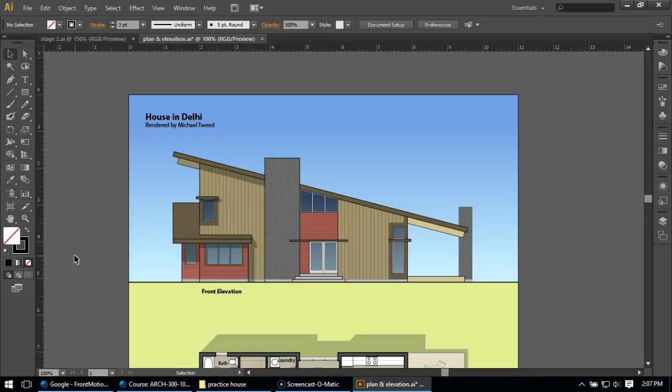I'm sure I'll talk about in class how I have this great Illustrator tree that I made, and it really is fantastic, but that's for a different topic for a different time.

What we're going to do is start our process of downloading things from Google and putting them into the file. So the first thing I'm going to do is go to Google, and I can do an image search by coming up here and hitting the image button, and when I type in something like tree and press return, it will return a bunch of pictures of trees.

What we want to do is save one that we can use in the background, and there's a few things we need to do to easily get this to work for where we currently are in Illustrator. For example, I may like this tree here, but it's got a sky and a ground, and if I put this into Illustrator, I'm going to see the whole photograph, so that's not going to work for me, unless I know Photoshop and can cut it out and want to spend the time doing it.

But we can see lots of other trees already have things cut out from them, and we don't have to do all that work. So we're not going to go over that step. We're just going to take an easy way around.

If I click on this one, we can see that maybe this tree would work for us, but it's going to turn out it doesn't work. I'm going to show you the reason why. Notice that this background is white. That means the background is white, just like this background is a sky and ground, and if I brought this in, it's going to have a big white square around it, but I don't want a big white square around the tree. I want it to take on the sky gradient that I applied in a couple videos ago.

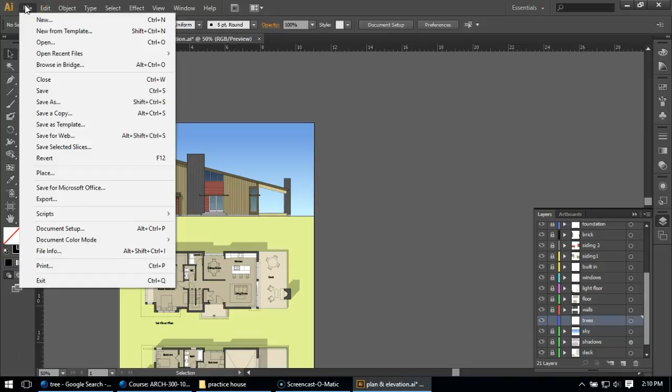And I'm going to place this tree into the file. So to do that, I'm going to go to File, Place, and I will go and find that file that I just did, which is right here because I've got it open, this hackberry tree.

Now, be careful - you can keep your file linked. If I link this in and I place this in as is, it needs to find the exact same spot. So if you just save this tree on your desktop in the studio and the computer restarts and it's no longer on the desktop, you will lose it. It will not be in your file.

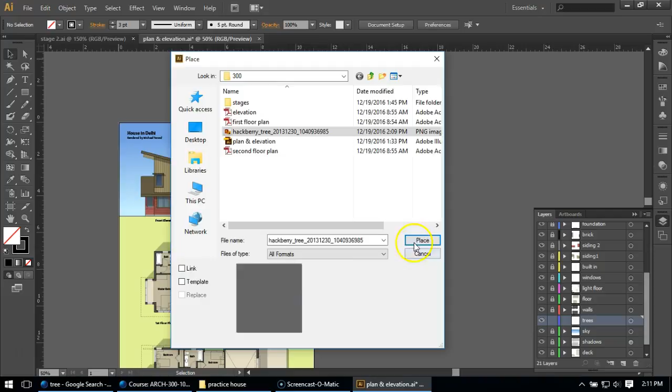So a safe way of doing it is to unlink it. Now that's going to make your Illustrator file bigger, but you're never going to lose the tree. It really doesn't matter as long as you have good practice, but for safety it might be better just to unlink it. So I'm going to go to Place. It's going to bring in the tree.

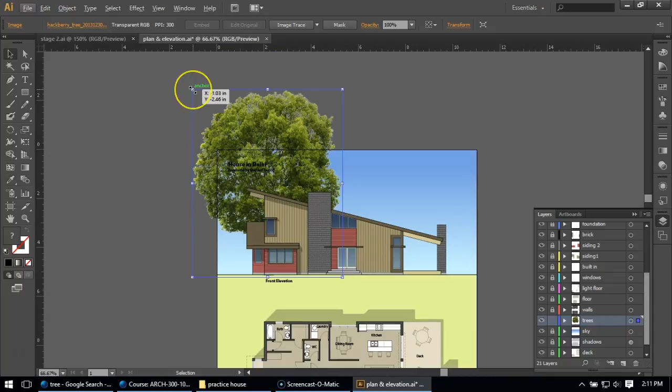Well, clearly this tree is way too big. It's not a problem. What I'll do is I'll scale it. In an elevation, the trees always sit on the ground line, so I can move the base of my tree right to the ground line that I have developed. And what I'll do is I can come up to the top corner until I get this angled double arrow here, click and pull and scale.

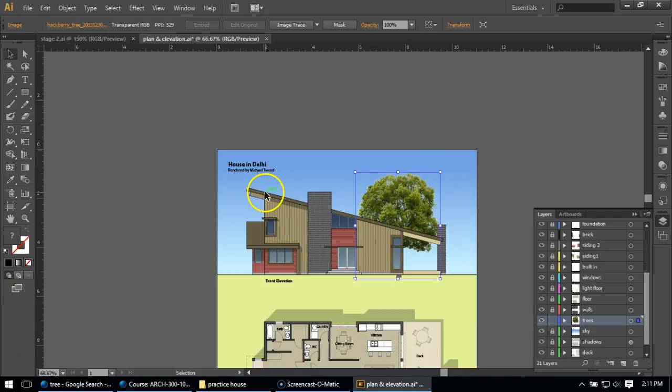If I hold shift, it'll be scaled proportionally, although a tree is organic and doesn't necessarily need to be perfectly even. And I can pull it over to maybe a good spot that I want to see it. Now this building is 2 stories, so maybe that's around 30 feet. That's a small tree, so I could actually make this bigger. If I wanted to, I could maybe even make it go beyond the top of the screen.

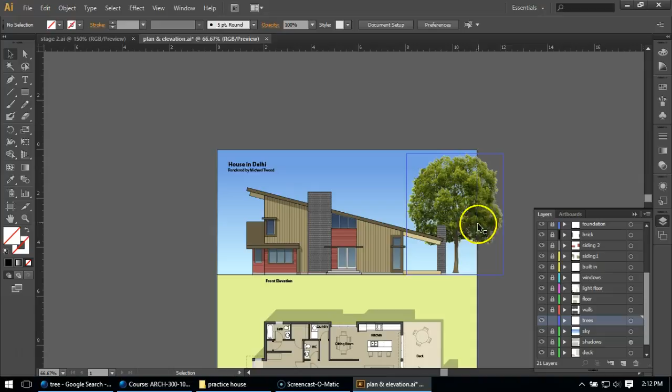In fact, I always recommend when you're doing trees that at least one hang off the side. So we notice that the edge of my paper is right here, but my tree is hanging over it. I got to move it down just a little bit here. There we go. But my edge is right here. When I go to print this, this part of the tree will be cut off, and it'll make it look like my trees are here.

If you contain all your trees within the paper size, it looks too forced. Because there's no way, if this was in sort of Delhi, as mine implies, or some sort of place in the country, that you would have trees perfectly aligned so that they fit perfectly in your rendering. They're random. They grow where they want to grow, so they hang off of things. Now what I'm going to do is use the same tree, though you could use multiple different trees, which would be nice as well.

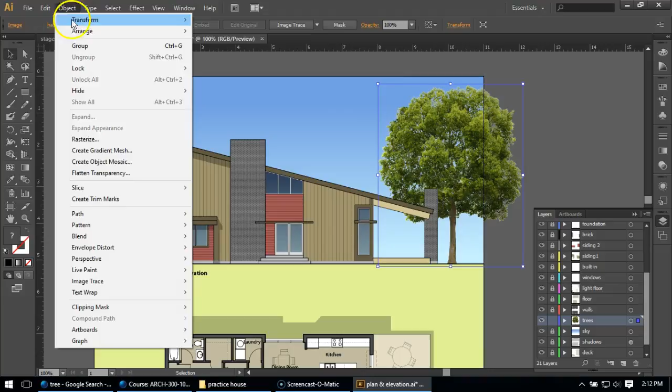Notice one thing too, which is nice about my tree: the light's coming from the top left, just like the light on my building is coming from the top left. If your tree shadow is coming from the top right, you could flip this under Object, Transform, Reflect, and I'll just do a preview. We can see it flips the lighting direction. I don't need to do that, so I'm canceling out.

But if your tree shadow that you liked was coming from the wrong side, it's usually going to come from the top, because that's where the sun's going to come, but it's a matter of left and right. You can just mirror it like that. Mine happens to be coming from the correct side here. So I'm going to put one there. I'm going to make a copy by using my black arrow, Alt, click and pull.

Of course, trees aren't identical, so I'm going to just maybe squish this down a little bit, move it in here, so it sort of comes into that location there, and at least it looks a little bit different because I squished it a little bit. It's not quite the right height, and I might just put one more off to the side on this side, and stretch it out and stretch it up a little bit, sort of getting in the way of my title there. I might want to move my title name if that's indeed where I want my tree.

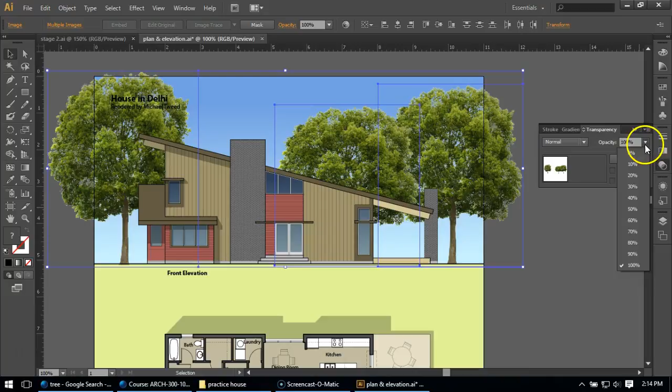But I'm going to do one more thing, because right now these trees are big and bold. I always have a problem with using realistic trees in almost any rendering for this purpose, but it's the easiest way to do it right now. But one way to tone that down is to select all of these trees and come over here and make them semi-transparent. They don't even have to be much, something like 80%. It's just going to tone those trees down a little bit to fade them. And they're in the distance anyway, so it sort of makes sense.

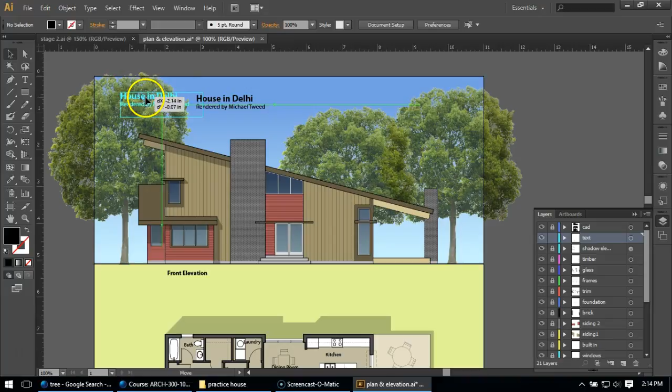And what I'll do now is come and unlock my text layer, and it looks like I'm just going to pull my title inbound because it's too hard to read. I don't necessarily like that spot either. Let's see, where might be a good spot for this. One thing I could do is keep my title here and change it to white. I wonder what that'll look like.

Yeah, I can read that. I'll go with that. A little tweak there. If you don't have a tree there, it's not a problem. There's lots of ways of solving that issue.

So there's trees. I want to add a scale figure or two, and I'm basically going to do it the same way. I want to put my scale figures pretty much on top. They want to be below the shadows, because if there is a shadow that they go into, they're going to be cast on it, but above all the rest of the rendering. So I'm going to do a scale figure in this location here.

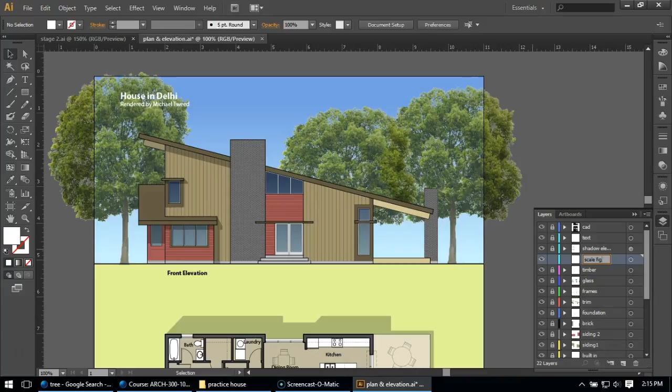I'm going to go back to my search, and I'm going to type in man walking silhouette. Transparent's fine. It's not going to turn up transparent, but I'm going to show you what I'm going to do. You could do women walking, you could do person sitting, whatever the case might be. I'm just going to do this. And I'm going to start with one scale figure. You might put in more.

And I'm going to click on this, and we're going to notice that it's not transparent. But because I'm using a silhouette, I have a shortcut I can do in Illustrator to make this transparent really easily, or quasi-transparent. But you don't have to do black. You could do a white scale figure. You could do a real person scale figure. You could do a gray scale figure. There's lots of different options out there, but I like doing it this way.

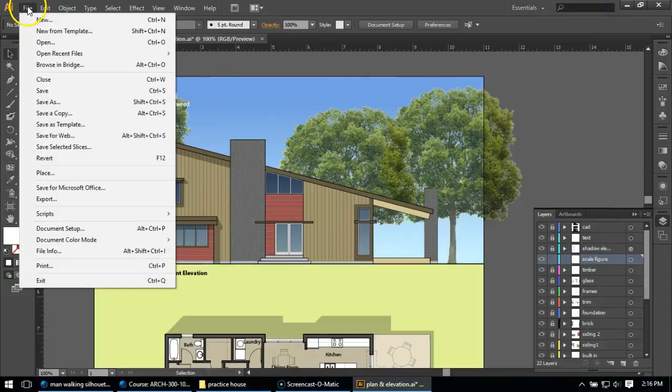I'm going to base it off of this guy. I'm going to right-click, do Save Image, just like I did for the tree. I'm going to save the image. I'm going to come to my Illustrator file. I'm going to go File, Place. I'm going to place this in, and it comes in as white, right? Which is not what I want.

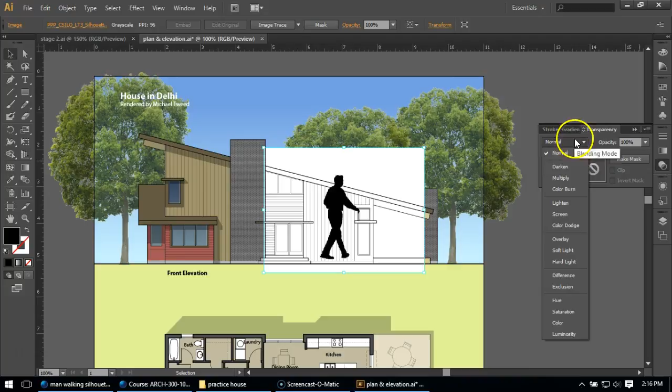But watch this. I'm going to go to transparency. I'm not going to change the transparency. What I'm going to do is I'm going to come over to here. This thing is called your blending mode, and I'm going to go to multiply, and what it does is it knocks out the white.

What multiply does simply is it takes anything that's white and makes it 100% transparent, anything that's black makes it 0% transparent, and anything that's in between, a gray tone or a color, it makes it the related proportional transparency of that. So when I have a black and white drawing like this man, or what you often have in architecture, it's a great way to make everything transparent except for the black pieces.

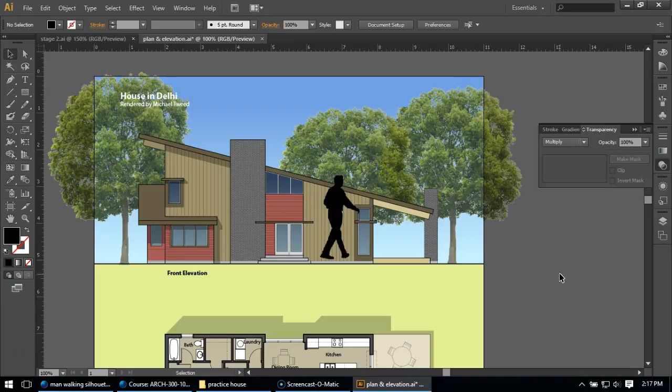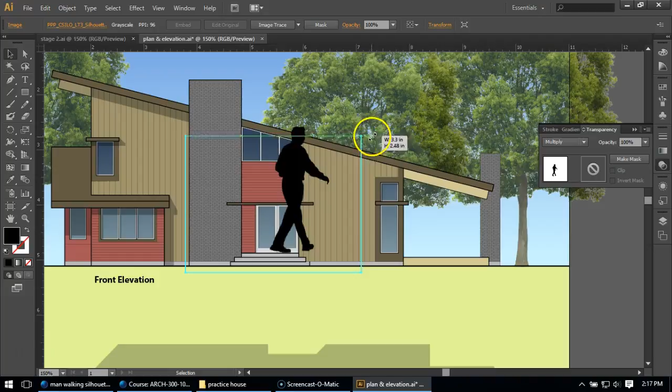Now, of course, right now this guy is a super giant. He is not correctly scaled, so I just need to scale him down, and I might use the door. If this is about a 7-foot door or so, I know he's going to be smaller than that, so I can at first sort of float him up in the air up here, come up to the corner, get the double arrow, press shift and pull in, because a person does want to be scaled the same. I don't want to make them short and squat, which will happen if I just pull down like that, right? That doesn't look right. I'm going to undo that.

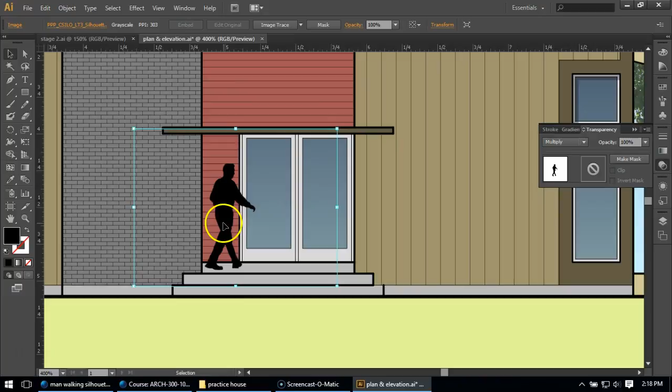I'm just going to go from the corner and hold shift so it's proportional until he's about the height of what a person would be against that door. A little bit smaller. Maybe a touch bigger. Of course, people aren't exactly the same height, so it doesn't matter, but I think somewhere around there looks pretty good. So then I can just move him wherever I want. He doesn't have to be at the front door.

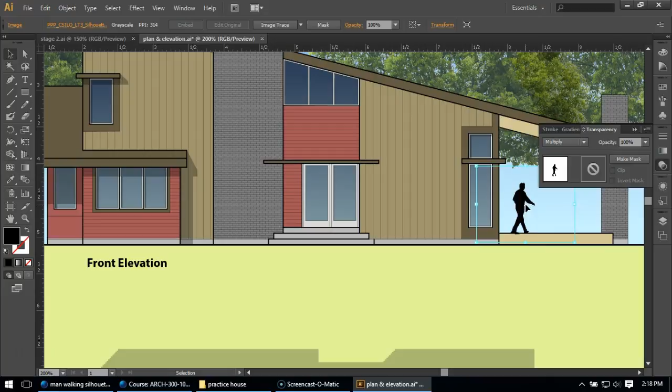I think what might be nice is if he's standing up over here on this deck. So I will put him there. You can sort of see how that fits into that. Again, you should add more people. It'd be great to have some people sitting out here on the deck. Maybe over here can be really sort of nice and lively. But I'm going to end it there in the interest of time, because I'm already over 10 minutes on this video, and it's really quite simple and easy.

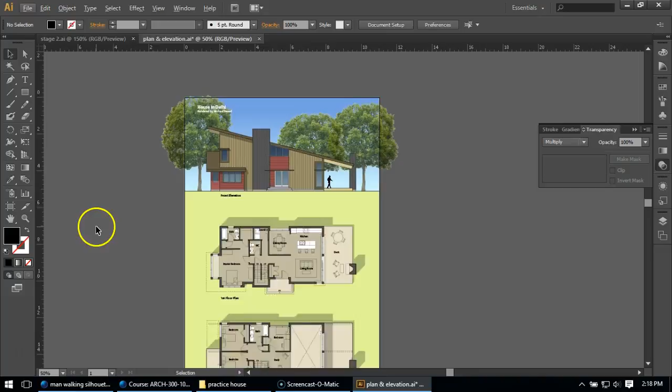But we can see as we start to have a nearly complete drawing, we're still going to do some things. It's much richer than the last time we printed out, because it's got trees and gradients and things like that, but the colors still aren't quite right. Would be great to get some more texture. It's a little plain down in these areas. It definitely looks like a computer drawing, and the next set of lessons we're going to do is going to look and see if we can enhance all of that.

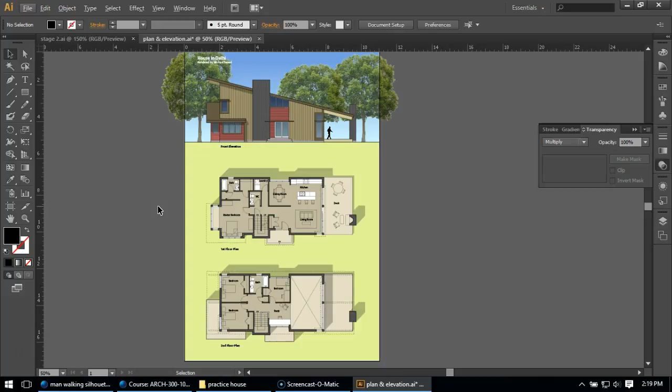But before we do that, we're going to print this guy out. We're going to hang these up on the wall and talk about them. So good luck.